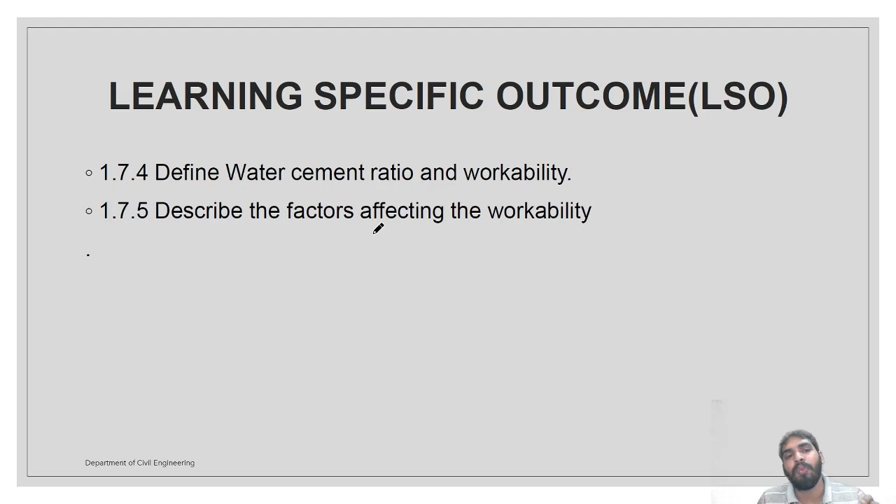Today in construction material engineering class, we will discuss the water cement ratio, workability and the factors affecting the workability. That is in your syllabus as per learning specific outcome 1.7.4, which says define water cement ratio and workability. 1.7.5 says describe the factors affecting the workability. So we are going to the topic directly.

First of all, definition of water cement ratio. As we know, concrete is a heterogeneous mixture of cement, fine aggregate, coarse aggregate, and water. Okay. So there should be some ratio that has to be fixed between coarse aggregate, fine aggregate, and cement. So there is some ratio present between the water and the cement. Which ingredient? Only the water and cement, there is some ratio. That ratio is known as water to cement.

The ratio between the weight of water to the weight of cement in the concrete mix is called water cement ratio. It is a weight to weight ratio. That is known as the water cement ratio. We know the quantity of water is very important while concrete is mixing, because the durability and strength of concrete depend upon the water consumption in the concrete.

As you know, the durability is how durable the concrete is, how much time it will last. As you know, with the Palarivattam bridge, the Papanisheri bridge, the durability criteria is not satisfied. It is being decayed after 1 year of construction. Actually, the building has to last for 20 years. So durability is a very important criteria. So in order to satisfy that durability criteria, the water cement ratio should be maintained to a sufficient quantity.

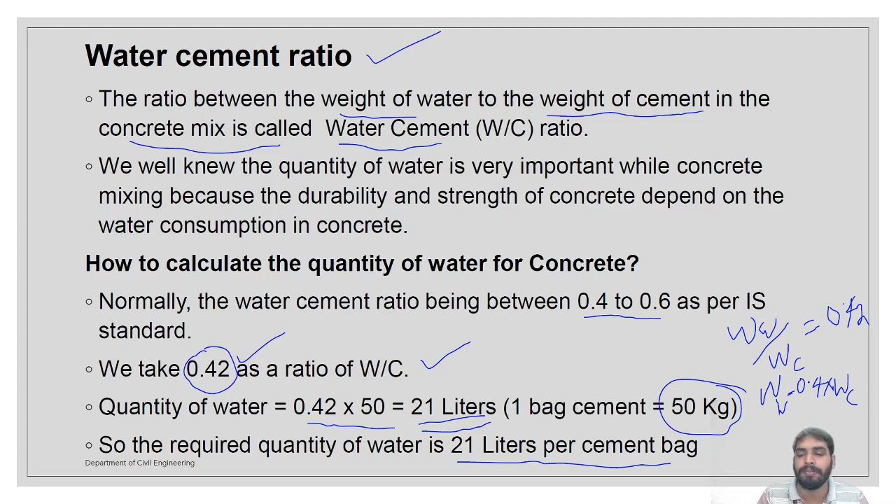Then define water cement ratio and workability. Next point is workability. As per the American Concrete Institute, as I already explained in the previous class, workability is the property of freshly mixed concrete which determines the ease and homogeneity with which it can be mixed, placed, consolidated, and finished. How easily we can mix it, place it, consolidate it and finish it. Actually, it is a hypothetical term known as workability.

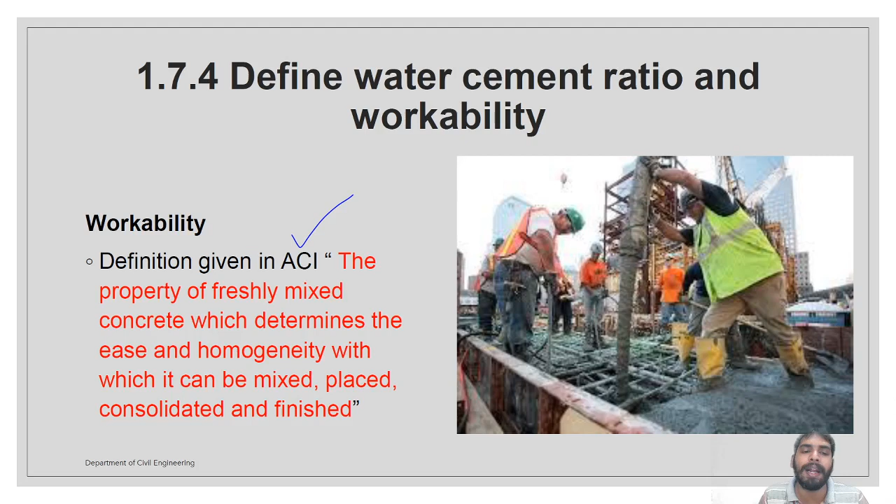As per Road Research Laboratory UK, which gives another definition for workability, it is the property of concrete which determines the amount of useful internal work necessary to produce full compaction.

നമുക്കറിയാം ഒരു കോൺക്രീറ്റ് കോമ്പാക്ട് ചെയ്യണമെങ്കിൽ there should be some internal friction between the particles. There will be a coarse aggregate. In between two coarse aggregates there will be an internal friction. In between a coarse aggregate and fine aggregate there will be an internal friction. In between two fine aggregates, if you observe in a molecular way, there will be some internal friction.

In order to overcome that internal friction, the concrete itself has to do some internal work. So some amount of work should be done. So the property of concrete which determines that work is known as workability. This is given by the Road Research Laboratory, United Kingdom.

Useful internal work is a property of concrete alone, although some amount of energy spent in order to overcome the friction of concrete and formwork. In between the concrete and formwork there will be some friction. Concrete and the reinforcement bar, some friction. Some internal energy has to be spent. So the property of concrete which determines that internal energy is known as workability. Clear?

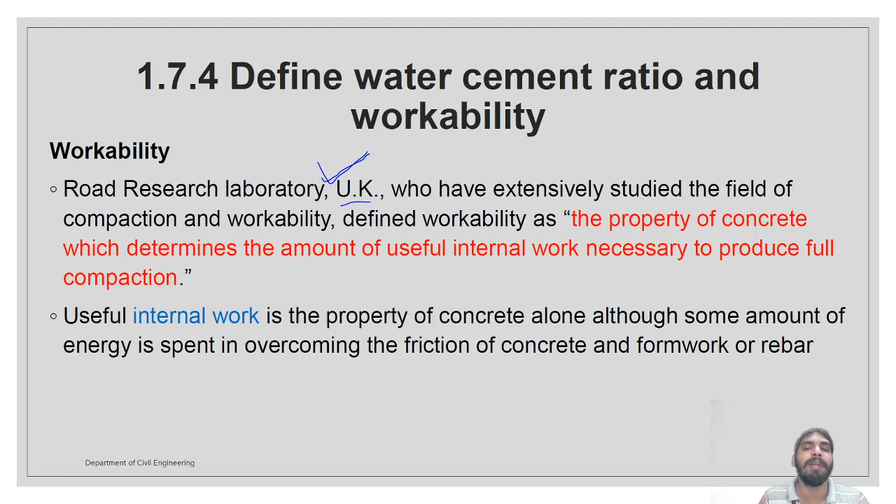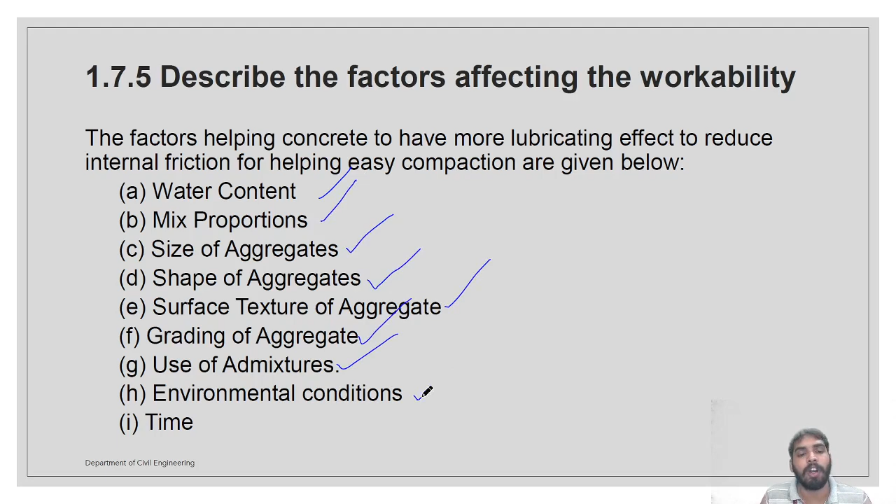So next, describe the factors affecting the workability. There may be numerous factors that affect workability. In that, the prime and important factors are the water content, the mix proportion, size of aggregate, shape of aggregate, surface texture of aggregate, grading of aggregate, use of admixtures, environmental conditions, and time. These are very important factors. So, how does water content affect it?

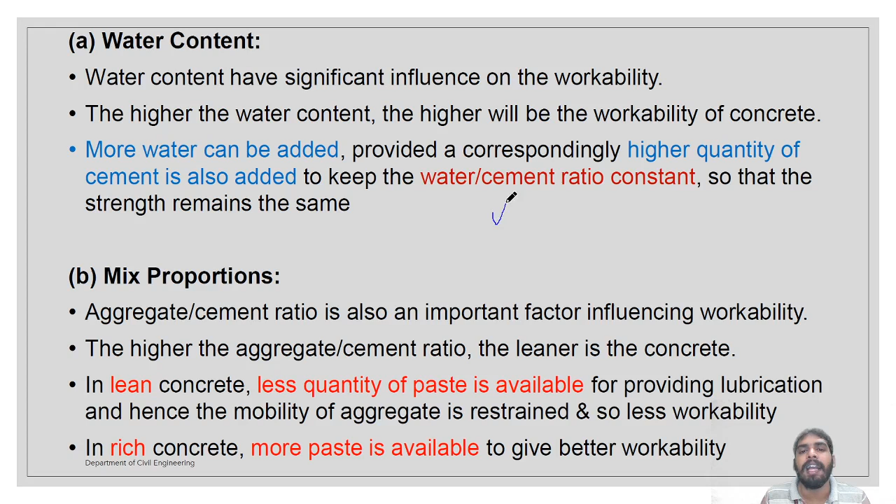So the thing you have to keep in mind is that when more water is added, the strength of the concrete decreases. As you know, the water to cement ratio has to be maintained at a minimum value of 0.4 or 0.5. If more and more water is added, the water cement ratio may go beyond 0.6. What happens when the water increases more than a limit? So what do we have to do?

In the meantime, you have to increase the cement content also. So what will happen? The water to cement ratio will remain constant. When water is increased, increase the cement content also. This is the best thing that you can do. So water content is a very important parameter.

Then mix proportion. In mix proportion there are so many properties. In that, the aggregate cement ratio is an important factor influencing workability. With a higher aggregate cement ratio, the leaner is the concrete. When aggregate is increased, what will happen? More aggregate will be there, and a lean mix will be produced.

So there will not be sufficient paste for the aggregate to lubricate. More aggregate will be there, the paste will be less. So there will be less mobility, not much lubrication, so less workability. So the aggregate cement ratio is a prime parameter. In rich concrete, more paste is available to give workability.

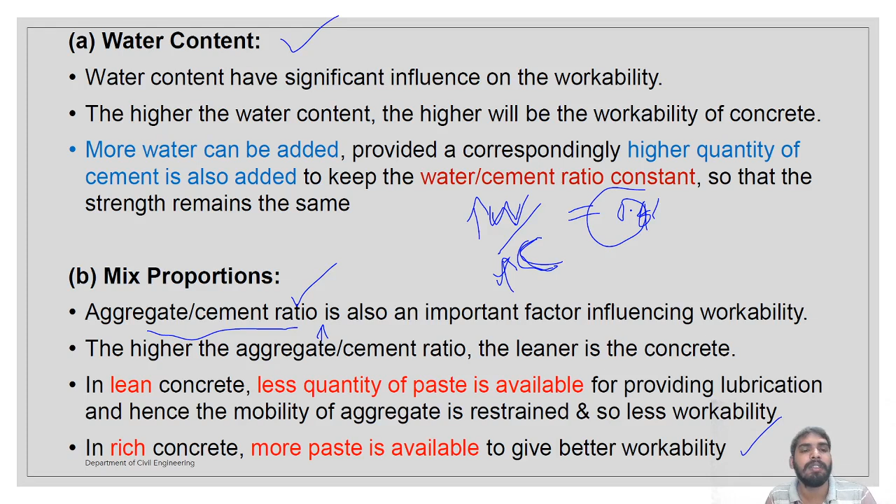When increasing the aggregate, increase the cement also. So it will give better workability. For the aggregates there will be paste; more paste will be available for better workability. So the aggregate cement ratio is an important parameter that determines the workability. Then size of aggregate.

If you use a bigger size of aggregate, it will roll നല്ല രീതിയിൽ അത് ഉരുളാൻ വേണ്ടി സാധിക്കും. So less is the surface area, and hence less water is required for wetting the surface. Less paste only is required. For a given quantity of water and paste, a bigger size of aggregate will give higher workability, so it will give better workability.

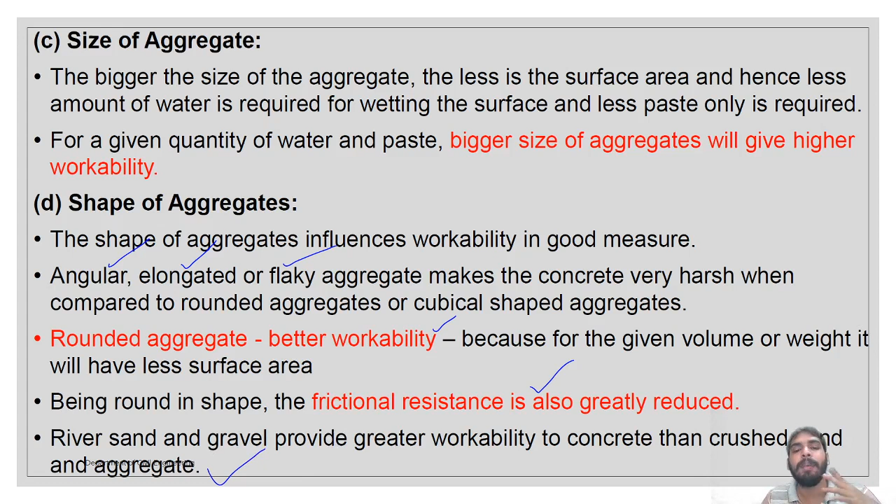Then the surface texture. If it's a roughly textured aggregate, there is more area. Surface area will be high, more cement is needed, more water is required, so the workability is very poor. When the area increases, more cement and more water are essential, so the workability decreases, right? Smooth or glassy textured aggregate will give less friction and better workability. So the surface texture should be smooth and glassy; the friction is less, so it gives better workability.

Then the grading of aggregate. A well graded aggregate. What is a well graded aggregate? There will be large particles, then some fraction of smaller particles, and again even smaller particles. All the fractions are in sufficient amount. So it is a well graded aggregate.

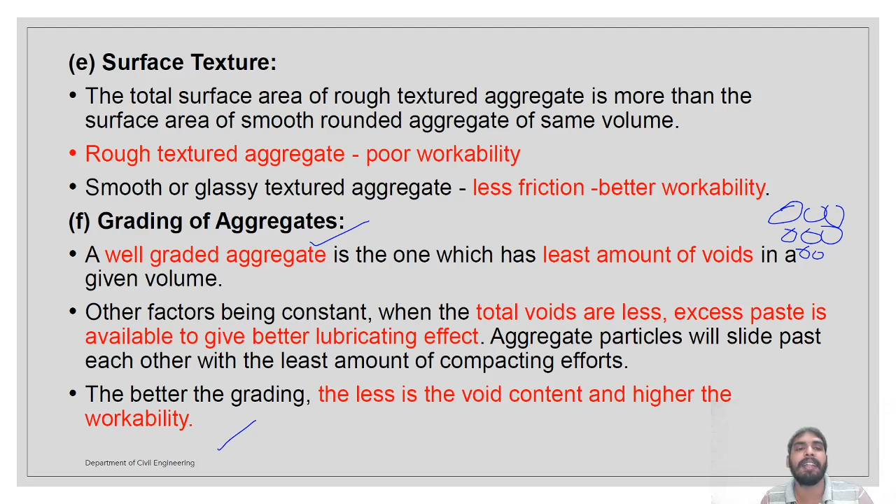Okay, so don't go for poorly graded aggregates; don't use the same aggregate of 6 mm, 6 mm, 6 mm. Go for 12 mm, 6 mm, then 3 mm. If you go like that, it's a well graded aggregate, with all fractions well graded. So it will give better workability.

Use of admixtures: as you have already studied, admixtures always increase workability. They decrease the internal friction between the particles, so they act as a ball bearing. The particles slide past each other, which gives mobility to the particles, so it always increases the workability. They also act as an artificial fine aggregate with a very smooth surface. Fine glassy pozzolanic materials give better lubricating effects and better workability.

Then the environmental conditions. On a hot day, temperature affects the workability. A hot day increases the water content needed to maintain the desired workability. If concrete is exposed to sunlight, some water evaporates, so on a hot day the workability will be reduced. So we have to keep the temperature at an optimum, and we should be very careful. If more water is added, more workability will be produced. So environmental conditions also affect the workability.

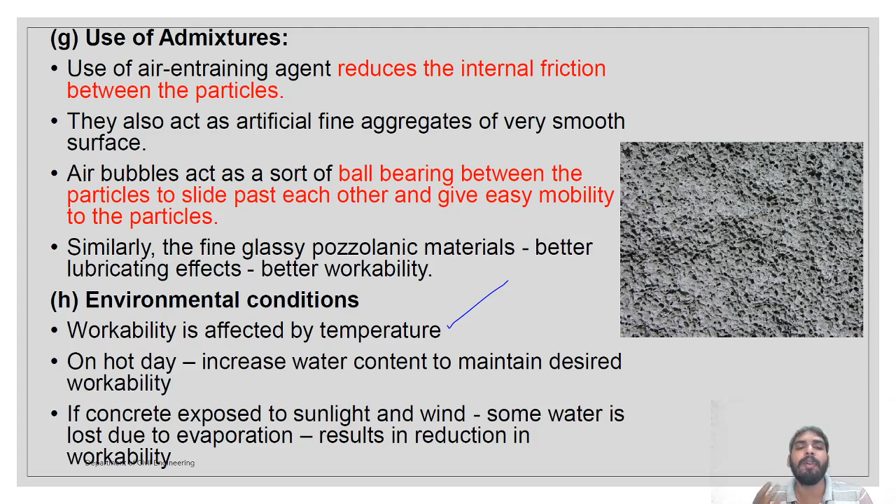Then time: fresh concrete loses workability with time. When the time increases, what will happen? Some amount of moisture will be evaporated. If water is lost, the workability decreases. There won't be sufficient water to lubricate.

On average, a 125 mm slump concrete, and you will be studying the slump test, may lose about 50 mm slump in the first 1 hour. There is a test called the slump test, using a slump cone, and we'll be studying how to measure the slump.

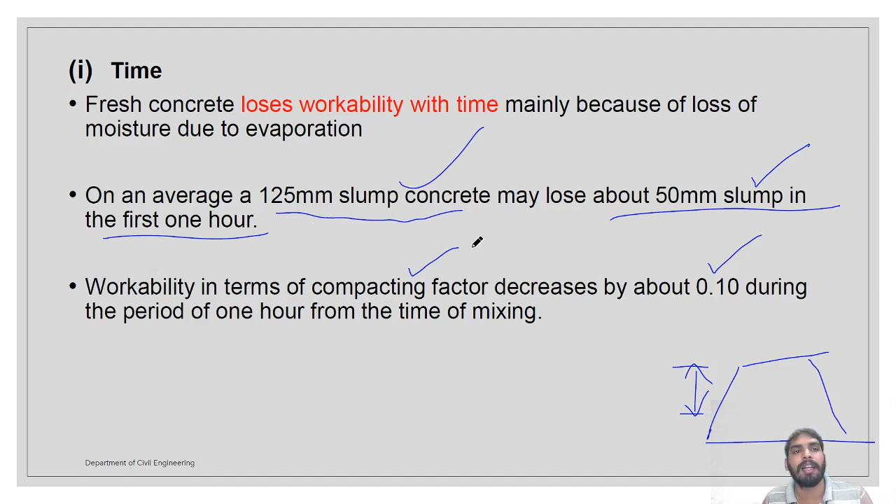So that is the difference. Workability is measured by this parameter, slump. Another test is the compacting factor test, measuring workability in terms of compacting factor, which may drop by about 0.10 over a period of 1 hour. So time is a very important parameter. You have to study both tests in your syllabus, which I will explain in the next classes. So time is a prime parameter in determining workability.